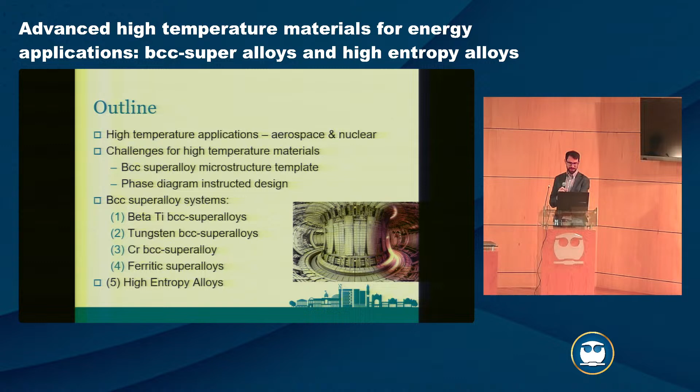For me, I spend a lot of my time thinking about energy and how we're going to solve the climate emergency that we face at the moment. We see that year on year, temperatures are getting hotter and hotter. And as engineers, what can we do about that?

In the UK, we have an interesting situation where now we build huge numbers of wind farms. The UK is kind of lucky, we have a lot of coastline, so we can build wind turbines offshore, and that works.

It's pretty cost effective, but this was an example day, just when I happened to take a data grab from a website, app.electricitymaps.com, where you can go on and see a map of the world and what energy they're generating and what it's from. In the breakdown here, whilst in the UK we have maybe 15 to 20% nuclear, on some days we might have 50 or even 70% of the energy generated by wind.

But on this day, there was no wind. And in the UK, you can have periods where there's three weeks with no wind. If we don't have wind, then instead we burn gas. So whilst the UK has spent a huge amount of money building zero carbon wind turbines for energy generation, we still are burning a lot of gas.

At other times we're importing energy from our neighbors. So in this example, we were importing a lot of nuclear energy from France. I was trying to work out the equivalent for Mexico.

I see a lot of the work is also in very important sectors on oil and gas. Certainly for the UK and many other countries, gas is going to continue to be a really important energy source. So we need to do new things to improve the efficiency, as well as look at alternative power sources.

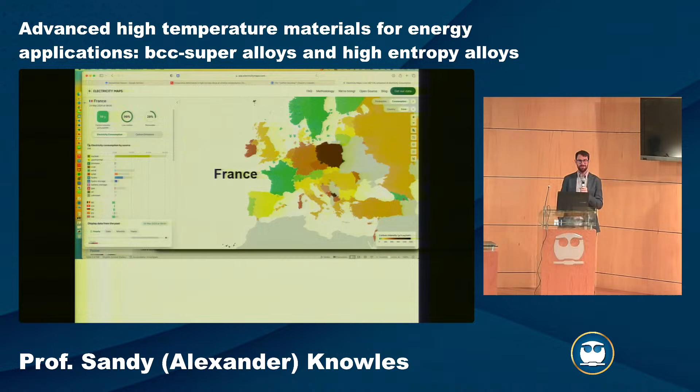For me, one of the examples of why I work on nuclear energy a lot is France. France is 70% nuclear energy. It's been that way for the last 30, 40 years. They have some of the lowest carbon intensity for energy generation in the world, and they make money doing it. They have the cheapest energy in Europe.

So for me, it works. We know it works, it worked 30 years ago. We just have to commit to do it. But in this, there's challenges, and as engineers, we have to try and solve those challenges.

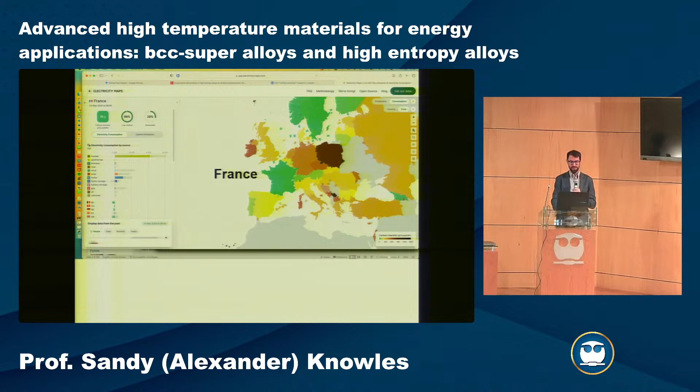So in gas turbines, we can think about these for jet engines. I do some work with Rolls-Royce, which are a jet engine manufacturer in the UK. I think it's crazy numbers - in the UK, they employ 1 in every 250 people. So as materials scientists, a lot of people work for Rolls-Royce doing jet engine research.

But a lot of the technology directly transfers into gas turbines for power generation as well. It's the same gas turbine section, which you can use for thrust or for electricity. And we've seen this huge improvement over the years in terms of reducing the amount of fuel that we burn in order to get a certain amount of energy.

So this is fuel efficiency in jet engines, or just energy generated if we're thinking about gas turbines for land-based use. This is really underpinned by what's going on in the engineering, but also specifically the materials engineering. We can think of different alloys in nickel-based superalloys. In these, we've seen progress over the decades, this gradual increase and improvement in the turbine entry temperature.

So where are we getting to? When we look at these current nickel-based superalloys, we see improvements in the turbine entry temperature from the engine and the engineering improvements, so thermal barrier coatings, cooling channels, these kind of things. But still, we want to improve the base substrate material. At the moment, when we look at nickel-based superalloys, it's coming to a plateau.

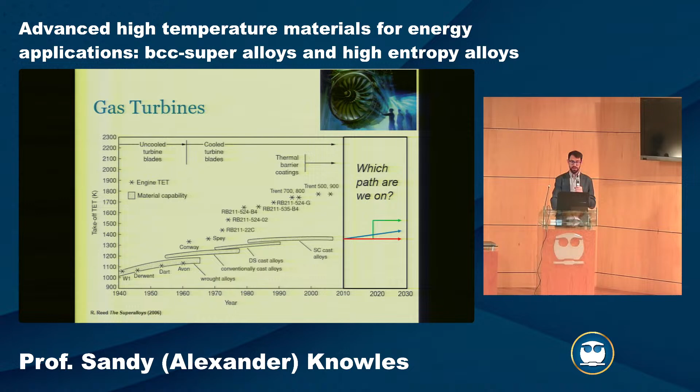So there's this big question: have we just hit the physical limit? Is it as good as it gets? We're not going to get any better? Are we going to see some kind of limited improvements in this iterative, more blue-line kind of way, where we're gradually seeing improvements, or could we instead try to look for something where we can see a step change in performance? In my research group, that's one of the things we're trying to do - is there something fundamentally different we can do to design the materials for jet engines.

We also work in nuclear fusion, so I spend a lot of my time working on fusion energy. I'm a visiting researcher at the UK Atomic Energy Authority, which works as a kind of fusion national laboratory. So JET, the Joint European Torus, has been hosted in this center in Culham for the last 25, 30 years. This still holds the kind of record for fusion energy.

That one's now just coming to the end of its research time. And we're now building in the south of France, ITER - the International Thermonuclear Experimental Reactor. I was very lucky, with Can and Tom, a PhD student and postdoc from my group.

In January, we were able to visit this thing, and it's really crazy. This thing costs, I think, $20 billion. So it's pretty expensive, and when you spend $20 billion, it gets pretty big. It's a massive, massive structure. This is kind of as big as any commercial nuclear power plant or large energy power plant. The size of this is like a 3-story building. It's really, really massive.

It's going to be probably the next 5 to 10 years until it's finished building. It's been built for the last 10 years, so probably 15 years total building time. Then we'll get first plasma, hopefully about 2030, maybe more like 2035. The key aim from ITER is that it will generate net energy out. So we can then know from a fusion reaction that we can use this to create the holy grail of energy - to almost have unlimited energy without much waste. It doesn't create long-lived radioactive waste like we have with current nuclear technologies.

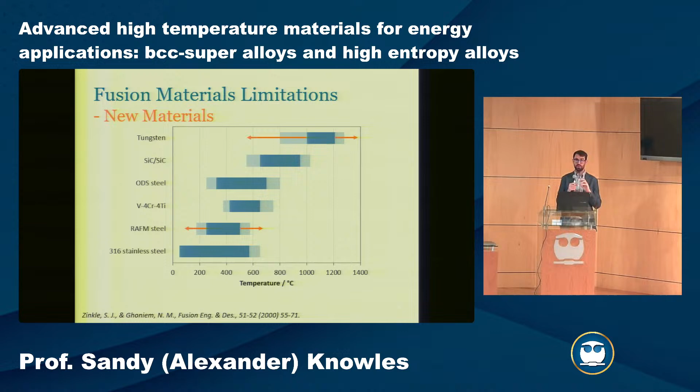So you increase the strength, but reduce the ductility. The research group, we tried to look for new materials that might solve both of these problems. We look at new high temperature materials just in terms of improving high temperature strength, improving high temperature creep resistance, also when you're irradiating it.

But we also look at technologies where we can improve the low temperature ductility and make them more irradiation resilient. So we look at this kind of host of challenges that we have for high temperature materials. It's not just kind of one parameter that we design for.

So when we want to improve a material, we often try to look to improve the strength of the material. That's kind of a first proxy for a better material. But we can't do that in isolation. We need to also think, okay, well, it's higher strength, but does it have sufficient ductility? Is it enough density? Does it have the environmental resistance? Is it oxidation corrosion resistant?

So when we design a new material, we can kind of benchmark against some previous materials, so nickel-based superalloys. When we look at, say, something like an intermetallic-based material or a composite material of ceramics, so silicon carbide or these titanium aluminide intermetallics, we often gain on strength, but then we lose out on ductility or fracture toughness. And so trying to take a material that creates a better balance of properties is a real challenge.

So we could look at something in my group - this is what we work on - trying to see whether we could beat this property balance by looking at something like BCC superalloys or also refractory high entropy alloys. In these we might get a small improvement or some improvement in strength or density, but without this massive cost in terms of fracture toughness.

And particularly we're looking at whether there's new strategies by which we can design for ductility within BCC metals.

So when we think of current high temperature materials, if we look at gamma prime in nickel-based superalloys, these ones are kind of the state-of-the-art materials used in jet engine materials. They can be hugely expensive. You're happy to use kind of elements like rhenium in them. Nickel itself is already pretty expensive. And in these, the fantastic thing about them is you get the high temperature strength, but also the creep resistance and oxidation resistance.

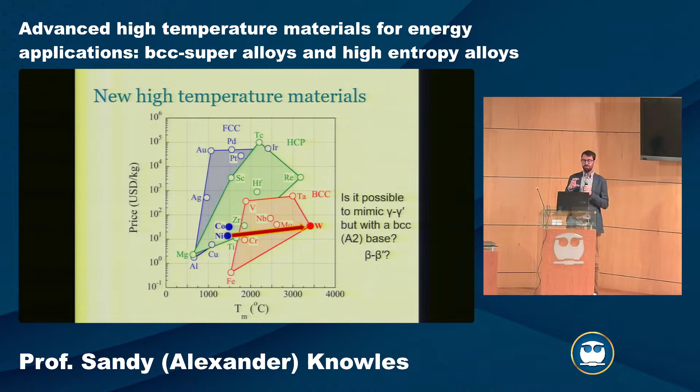So the question then is: is it possible to mimic gamma prime, but in a BCC-based system? Is there such a thing as beta prime? This has been this concept area of BCC superalloys. If we have nickel-based superalloys, I would call them an FCC superalloy. These are body-centered cubic, and we can use all of the different BCC metals that we might be interested in, from titanium, chromium, tungsten, molybdenum. And then we need to think, okay, well, we've changed the crystal system of the matrix phase, so we also need to change the crystal system of the intermetallic reinforcement.

Luckily, there are a large number of intermetallic crystal structures that do have an ordered BCC crystal structure. For example, nickel aluminium or titanium iron both have this ordered BCC-like symmetry, which could potentially be a superlattice compound for a BCC matrix. So what we need to do is try to find out which phase diagram is analogous to nickel aluminium. The challenge is not just having the two compounds, the matrix and the precipitate, but you need to have the two being in equilibrium with one another.

So this was this search to say, okay, we want to have the two phases, BCC and ordered BCC, in a two-phase equilibrium. Which systems exist? We can search phase diagrams, we can also use computational methods. And of the binary systems, there's really very, very few. One of the ones that comes out is tantalum technetium or titanium technetium. How many people have heard of technetium?

It's not a very common element. It has no stable isotopes, you only really get it through nuclear reactions. So again, like platinum superalloys, not going to be very useful if we need to make a jet engine out of it. But again, I'm still just amazed that someone did the test to look at titanium technetium. It's kind of a crazy thing to investigate.

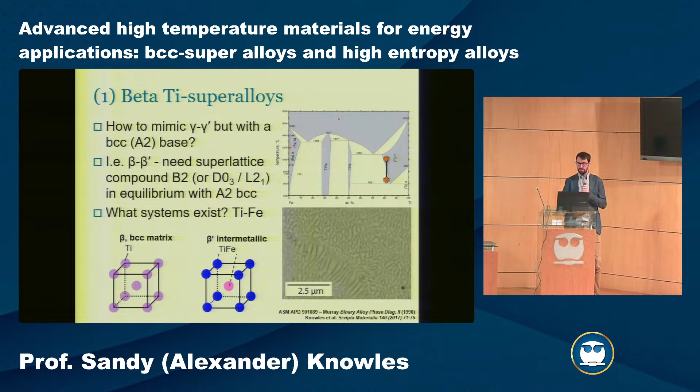In a titanium base, there actually is, in the titanium-iron system, you can have BCC titanium at high temperature in equilibrium with this titanium-iron phase, which is an ordered BCC intermetallic. Early work from my PhD time, we looked and tried to see whether you could utilize this precipitation reaction. And then Paraic and Vincent, who have been PhD students with myself, have been digging into the system in greater depth.

With Paraic, we were particularly interested in really understanding the phase equilibria. One of the challenges when we're trying to design these unusual systems that are away from traditional alloys is that very few people have looked at them, and therefore there is very little data. And if you don't have data, then you can't really design anything. So to start off with, we tried to revisit just the titanium-iron system.

You might think titanium and iron are quite industrially used very widely, both titanium alloys and steel metallurgy. You might think the understanding of how titanium and iron mix together is very well understood, but we found that actually a lot of people haven't looked into these spaces between the two elements in great detail.

So we looked at both the phase equilibria, so we can do things like SEM EDX, scanning electron microscopy, where we can identify the precipitates and measure their composition. We then went into more detail with transmission electron microscopy images, where you can see the columns of atoms and how they're arranged.

We tried to use this, as well as adding in additional elements like aluminium and chromium, in order to improve oxidation resistance. So this was one project with Paraic. With Vincent, we had a project particularly interested in the mechanical behavior of these systems and looking at slip systems. I'll talk about both of these in turn.

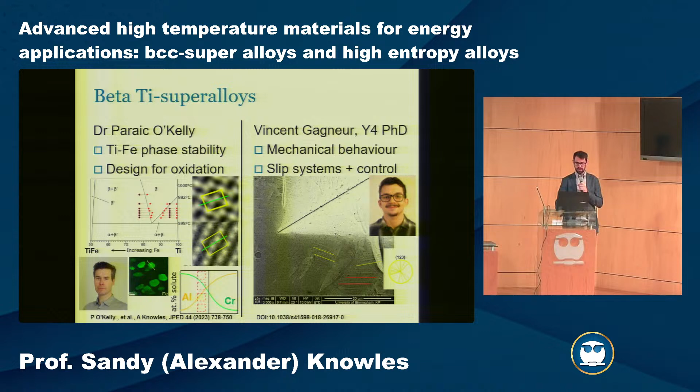So understanding a bit more about the binary phase diagram: we have this high temperature BCC phase field, we have this intermetallic of titanium iron, and we're particularly interested in this region in the middle between beta and beta prime, where you have the two phases in equilibrium.

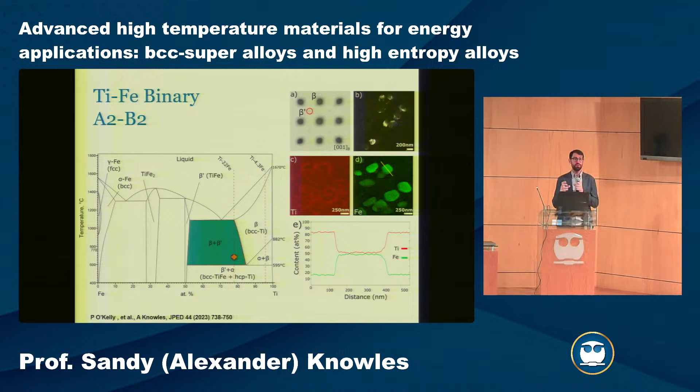What we found is that if we take specific compositions of alloys and choose the heat treatment carefully, we can produce these kinds of microstructures that end up with a two-phase structure of BCC and then the titanium iron intermetallic.

Instead, with Vincent, we were interested in the mechanical behavior of these systems. When you deform a BCC metal, you have dislocation motion, typically a half-one-one-one type Burgers vector, where you're going from the corner atom to the center body site. That allows you some ability to have ductility and toughness in a material.

One of the challenges in the titanium iron intermetallic and some other intermetallics is that rather than slipping to this body-centering position, which swaps the two atom types - you have your A atom on one corner and B atom in the middle - if a dislocation goes through that corner diagonal, it swaps the atom positions, creating an antiphase boundary, which has an energy penalty.

In the case of titanium iron, the atoms really don't want to be similarly bonded. They much prefer a titanium-iron bond than a titanium-titanium or iron-iron bond, so instead it deforms on 100. This avoids forming an antiphase boundary, but it's a longer Burgers vector, and the challenge is then you also don't have enough slip systems for full ductility.

So with Vincent, we wanted to find a high throughput way of screening this. Every time you do TEM analysis - anyone who's done TEM microscopy knows - you lose probably 6 months of your life on one sample. So we wanted to see if there's an easier method of doing this.

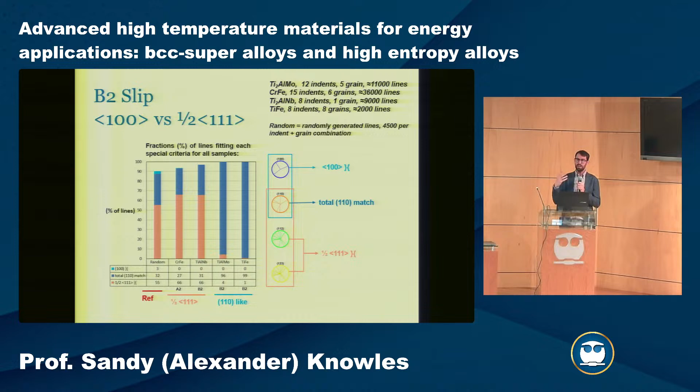The next system I want to talk about is tungsten BCC superalloys. We took the knowledge we had of the titanium system and the titanium-iron intermetallic, and asked could we do the same thing but combining it with tungsten? So now we've gone from a binary phase diagram, moving in complexity to ternary systems.

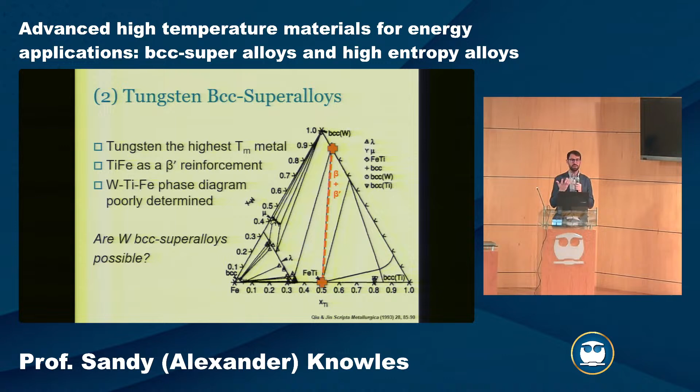Along the bottom here is this titanium-iron system. The bottom right is our BCC titanium. In the middle we have our titanium-iron intermetallic. The question we had is, going across this phase space, is there a two-phase line that goes all the way up to BCC tungsten? This would make the idea of a tungsten-based superalloy, which would be really cool if possible.

So we go in, make alloys, choose different compositions, tune and try to scan across the phase diagram, making steps in composition. This is an example for one of the alloys we studied - I think it was 5 to 10 alloys of different compositions. With this alloy, you have BCC tungsten, BCC titanium, and also this beta prime titanium iron, so there's equilibrium between these different compounds within the phase diagram.

When we zoom in with TEM, if we go into these dendrite regions, the tungsten-rich regions, we see there's a secondary phase within them, and we were curious whether that phase might be titanium iron. So this is transmission electron microscopy again, where we're looking at the composition of those precipitates. We see they are enriched in titanium and iron, with the matrix being tungsten.

We can then do diffraction, select area diffraction methods, where we go into the TEM and do electron diffraction, and we can see characteristic reflections of this beta prime intermetallic. So we both have something rich in titanium iron, but also this has the crystallography consistent with the titanium iron phase.

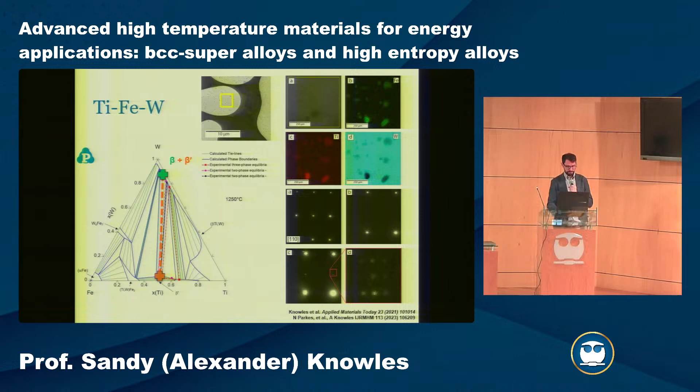So we have this method called CalPhaD, one of the main computational design methods when doing alloy design. One of the things CalPhaD has done is taken in all of this phase diagram understanding and pulled it together. So rather than me just pointing at a dot on a phase diagram, you can say that composition, that temperature, and read off which phase is present - this is CalPhaD, computational phase diagram models and databases, which you can plug in on a computer.

You can say I want to give this composition with this temperature, and it will predict what is the likely phase formation. You can also tie that into scripts and do almost like AI-directed materials design.

One of the questions we often have with these BCC superalloys is whether we can do computational design with these new alloys. One of the challenges is that we don't have the base data - the model relies on prior data, and if you don't have any data, you're not going to get a very good prediction. So for a lot of our work, we've had to go and do things experimentally - you go melt it and really look at it.

What we try to do is take that knowledge we've gained experimentally and tie it into a model. So over time, we'll build up predictive understanding.

The other side of things is to try and start to demonstrate the properties of the materials. So this was what I would call model alloys, still quite simple, just binary and ternary compositions. But we can begin to look at what kind of properties can be achieved in these materials.

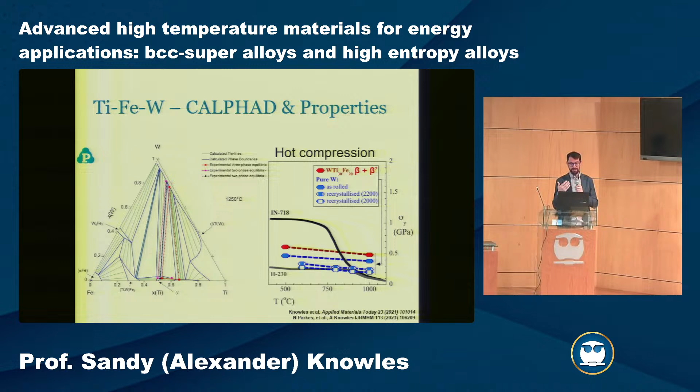And what we find is this tungsten superalloy, at 1,000 degrees C, we're still maintaining half a gigapascal, so 500 megapascals of strength at 1,000 degrees from a very, very simple alloy, literally just a 6 month to 1 year project, and we can already beat nickel-based superalloys and tungsten. So this gives us confidence to continue going down this path.

The next system is then looking at chromium-based BCC superalloys. This is work from Dr. Kan Ma and Tom Blackburn, who have been researchers in the group on a European project.

In concentrated solar power, you have photovoltaics, which is what people typically consider as solar panels or solar power. But there's an alternative method where we instead use thermal solar.

In this, you have a massive field full of mirrors, maybe 1 or 2 kilometers, a big field full of just mirrors, which all focus the sunlight to a central tower. That's what's indicated on the left-hand side, but there can be maybe 1,000 panels within an array, and they're all just focusing, with just a mirror, the sunlight to this central tower.

At the central tower, you can then get to really, really high temperatures, so you can melt steel very easily. You can go to around 2,000 degrees if you wanted to. It just depends on how much coolant you put through, but very, very high heat depositions.

In the technology being pursued by our consortium, but also by Heliogen, which is a unicorn, a multi-billion-dollar startup in the US, the idea is to use ceramic particles as the heat transfer medium. They have good stability, high energy density, and you can then take these hot particles and also store them. So when the sun isn't shining, the particles stay hot, giving you a way of storing that energy over time.

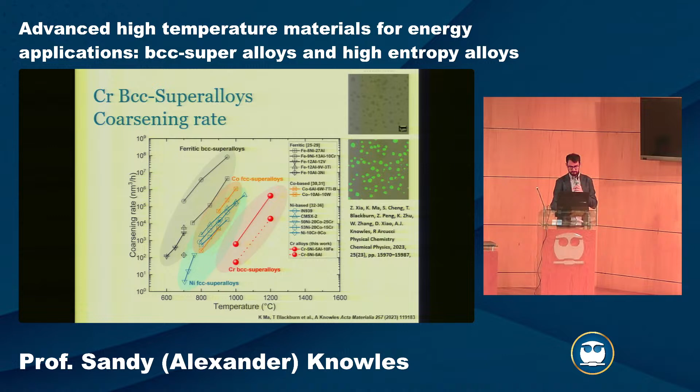We then also looked at the mechanical behavior of these things. These are relatively simple alloys, with four elements: chromium, nickel, aluminium, and a certain amount of iron to tune the microstructure. We can get very high yield strength at high temperature, competitive with about 30-40 years of nickel superalloy development in the case of about 3 years of work, which is really exciting. So we're there in terms of strength. We're not yet there in terms of the balance of properties. We get good strength, good oxidation resistance, good corrosion resistance, but we don't yet get ductility.

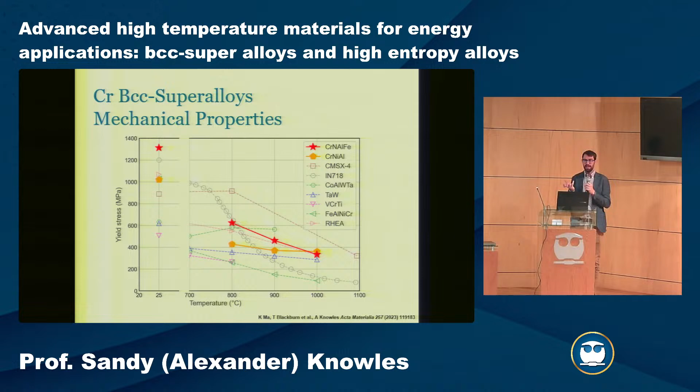This is one of the major challenges for BCC superalloys, for BCC alloys, and for intermetallics: trying to get this combination. You can improve the strength, but do you do it at the cost of ductility?

So the last of the BCC superalloy systems is this one class of ferritic superalloys. We have quite a large number of people working on this in the group. It's quite an attractive system, based on iron and aluminium. As you add aluminium into a steel, you reduce the density, which is quite attractive if you're trying to lightweight automotive and other applications.

Again, we're taking this microstructure concept of a BCC iron-based matrix, with ordered intermetallics as the reinforcing phase. You can form these cuboidal gamma-gamma prime-like microstructures, but instead now we're, I guess, alpha-alpha prime, using steel nomenclature.

So here we have the interest of developing high temperature strength, but we're also now looking at a radiation environment. When you irradiate a material, you bombard the lattice sites with an incident particle, which might be a neutron or a high energy ion. As it hits into the lattice, it disrupts and creates a cascade of damage. When you impact and irradiate a material, you tend to create a lot of vacancies and dislocations, creating defects within the material. These will harden the material, but also potentially embrittle it.

So what we really wanted to look at is using interfaces as defect sinks. If you have an excess of vacancies or dislocations within the material, a large number of interfaces can act as sinks for these radiation defects. If you imagine a dislocation at the interface, and a vacancy moves to that region, it can just extend the dislocation line, allowing for the annihilation of that vacancy. So if you can reduce this accumulation of defects within the material, you can make it more resilient to radiation damage.

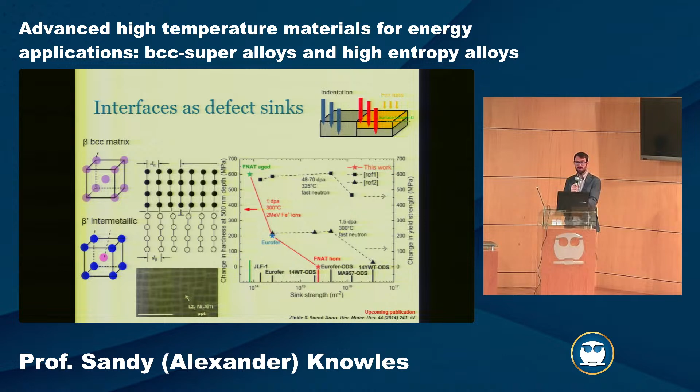Within Birmingham, we're very lucky. Within my lab, we do a lot of work on physical metallurgy - producing alloys, doing characterization using advanced methods like SEM and TEM, and we also collaborate for atom probe tomography. Then we do mechanical testing, this kind of thing.

The other thing we're very lucky for in Birmingham is that we have a very strong physics department, and within that they do a lot of particle accelerator style work. This includes something called proton irradiation. So we have a cyclotron - we can accelerate protons within an electric field and large magnetic confinement, and we can irradiate the material with protons.

If we do this, we can use a different method of studying how the material behaves to best simulate a nuclear environment. As well, we also have a neutron accelerator, so we can bombard materials either with protons, light ions, or with neutrons in order to simulate irradiation damage.

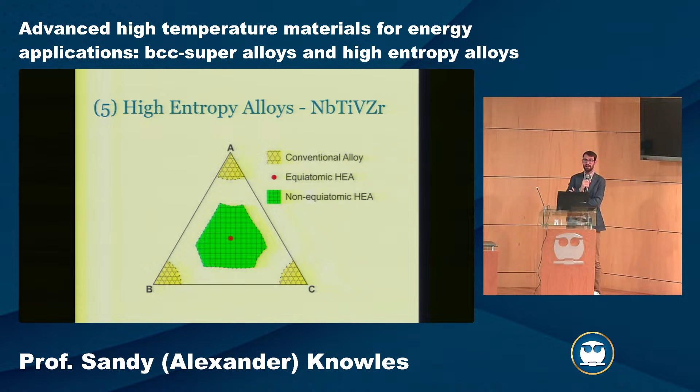So the last topic area I wanted to talk about is high entropy alloys. This has seen a lot of interest in the academic community recently - in metallurgy it's definitely a very popular area. We're going to talk a little bit about what they are and some of the work we've been doing on them.

In a high entropy alloy, there are other phrases used to define them - they're also known as complex concentrated alloys or multiple principal component alloys. The key concept is that rather than having a pure element - previously we've talked about tungsten alloys, titanium alloys, steel alloys - in this, we instead look at something which is a combination of elements.

If we look at this kind of pseudo-ternary, we have A, B, and C - these might be pure elements. But instead, if we mix them in equiatomic concentrations, we get something different in the middle of this phase space. What was particularly unusual about high entropy alloys is that when you mix multiple elements together, as we saw in previous work with binaries and ternaries, you often get intermetallics. So for example, if we added chromium, nickel, and aluminium together...

We formed a two-phase equilibrium which contained BCC and nickel aluminium as an intermetallic. What's been quite unusual in a number of high entropy alloys is that it's possible to form a simple crystal structure - be it BCC, FCC, or HCP - within this complex composition space. And that gives us a new design rule in order to make new materials.

So the idea here is that we've got a simple crystal structure - we've got a large number of elements, but a simple crystal structure. This means we have very, very different properties in that material compared to a pure element. There are a few ideas here.

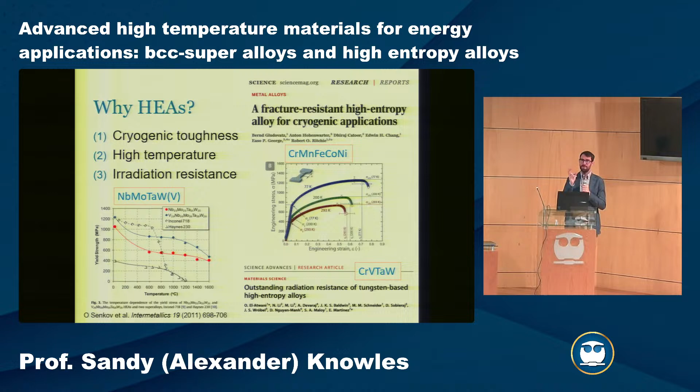It's not a guarantee, so not all high entropy alloys are fantastic. Some of them are terrible, but some of them show this kind of behavior that really doesn't exist in other materials. And if we can understand the mechanisms for that, it can really help us try to design new materials.

So this has become a huge area internationally. Now year on year, we're seeing over 1,000 papers published a year by the community, which is a big increase compared to any other sector. So certainly this is one of the fastest growing areas of metallurgy, I would say.

Probably a similar thing 5-10 years ago, we saw a similar trend, say, in additive manufacturing - a huge growth trend. Now I don't know if we've seen peak additive, but we're certainly close to it. Whereas in high entropy alloys, it seems to be growing very quickly.

And over the last couple of years, I've spent most of my time working in refractory metals, and we've seen a big growth in the refractory high entropy alloys.

So the question is, what do you do? How do you design a high entropy alloy? A high entropy alloy can just be defined by mixing different elements together. So we could take a dartboard and just throw darts at it, pick 5 elements, and that would be a high entropy alloy.

And I think this has kind of been done. If you go in the literature, there's lots of different mixes. You have a paper which is, okay, we'll do zinc, molybdenum, cobalt, iron, aluminium, and we'll see what happens. You can just mix it together and have some fun as a physical metallurgist seeing the microstructure and seeing what the properties are.

So maybe doing it completely randomly is not the best idea, but every so often - you know, we discovered penicillin from a kind of random chance thing - so maybe we should sometimes do some random chance work.

Other things we could do - well, we could just say, Brian over there, Brian Cantor, did some great work, and Jien-Wei Yeh both found this alloy, cobalt, chromium, iron, manganese, nickel, and that's a great alloy. So you're like, okay, let's see if we can make it better. We could take a good starting point and try to improve upon it.

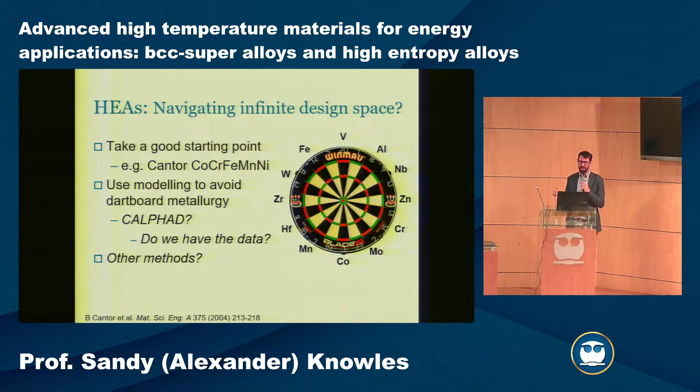So there's quite a number of groups working on this, and this was with a colleague of mine, Dan King, who did his PhD on this in Australia, trying to develop a new high-throughput screening method. He was looking at methods which are effectively akin to the Hume-Rothery rules for whether elements are likely to mix together.

So one of the parameters is just the atomic size mismatch. If elements are very different sizes, they're probably less likely to want to mix together. And he then developed this phi parameter, which was trying to predict the entropic stabilization, trying to predict entropy.

And when we take this - this code is really nice. It's technically publicly available, but I think the website link died, though we have a copy of it if anyone wants it.

The interest he then took in Dan's work, and when we worked together, was to try to combine that with another parameter. This could be melting temperature, but in our case we were looking at neutron cross-section, because we wanted to develop new materials for nuclear reactors. Within the core of a reactor, you have the fuel clad around the uranium fuel, and you want to get neutrons from one bit of fuel to the next. Currently reactors generally use zirconium, which has a very low neutron cross-section, but we wanted something with low neutron cross-section that also had potentially high temperature strength.

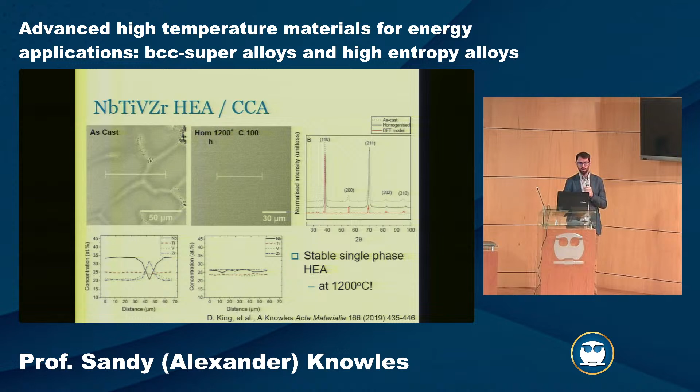If we then go on to thermal anneal it—since we're trying to develop materials for high temperature applications, we need to know what happens through the use temperature. When you process it you might need different conditions, but also when you use it, for example in a high temperature nuclear reactor, it's going to sit at temperature for a long time, so we need to know whether it might decompose.

So in this case, this high entropy alloy, despite all our entropic stabilization, doesn't stay single phase—we do get decomposition and formation of intermetallics. With some painful work, we can also do TEM as well as SEM, EDX, and X-ray diffraction to work out which phases they are. We get quite similar phases to what is predicted by CalPhaD, but at different temperatures. So CalPhaD gets some of the way there, but it's not enough to truly design an alloy—it gives an indication, but doesn't have sufficient accuracy yet.

So this could be a problem—we've kind of failed at creating a single phase high entropy alloy. But as metallurgists, the majority of materials we use do have multiple phases in them. So rather than having something single phase, we now have a multi-phase material that is potentially a mechanism by which we can get high temperature strength, high temperature creep resistance, and also, as we talked about earlier, these interfaces acting as defect sinks. So potentially this could have the benefit of producing something radiation damage resistant.

So we have a range of different work carrying on, investigating different alloys of refractory high entropy alloys. Particularly the challenge is we want to look at thousands of compositions in a much wider design space, and how do we do that quicker? One method is to develop new modeling methods that allow you to screen and then do more focused experimentation. The other is to look at high throughput experimentation methods, where we try multi-composition gradient materials and mapping techniques so we can discover more materials in one experiment.

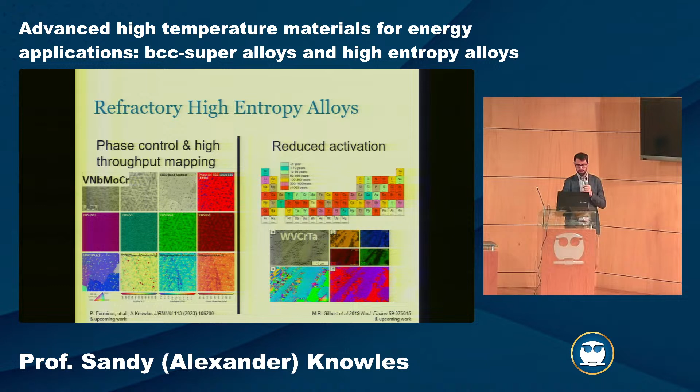This topic of high entropy alloys and BCC superalloys has now also caught on in the literature. We were doing the two topic areas separately, looking at them in isolation, but actually now there's a lot of work looking to combine them. Internationally there's a lot of work now - at TMS there were about 10 or 20 presentations on this topic of refractory high entropy superalloys, particularly this system of niobium, tantalum, titanium, vanadium, zirconium, aluminium - a bit of a mouthful. You can get these kind of cuboidal gamma-gamma prime type microstructures.

So to summarize, that's the two key topic areas we've been working on: BCC superalloys, where we can mimic this gamma-gamma prime-like microstructure but in a BCC metal. We've done a lot of work trying to produce and characterize them and evaluate some of their base properties, but there's still work to be done trying to develop adequate ductility.

Then on refractory high entropy alloys, one of the key questions is how you efficiently design these materials and discover them, and also demonstrate some of the mechanisms as to why some of them show these really advantageous irradiation performance. A big thanks to many people in the research group who have helped perform this work, as well as many collaborators in the UK and internationally who have got involved to take this work forward and support me in my career.

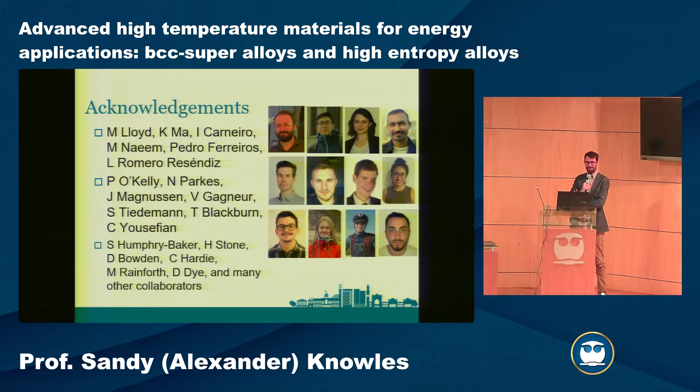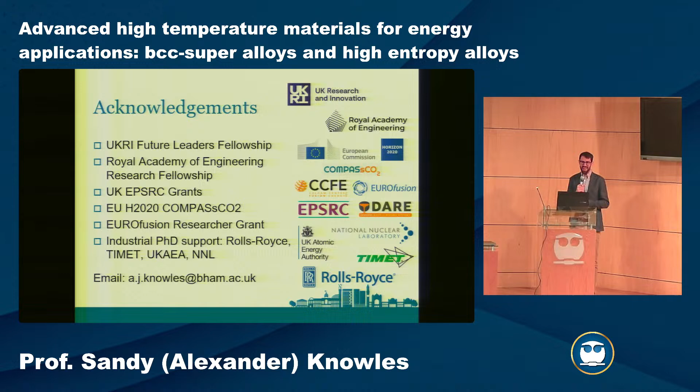And then a great many research funders who have supported this work, particularly the UKRI Future Leaders Fellowship, which has allowed me to work with Lloyd and Naeem, so that's been a great pleasure. And then different grants that we've had that support this work. So it's been a pleasure to talk to you all. Happy to take any questions.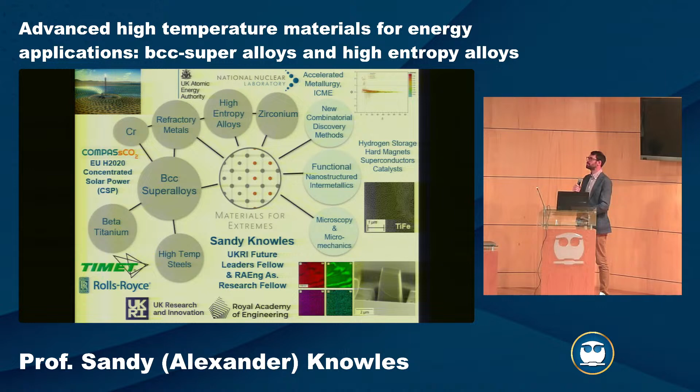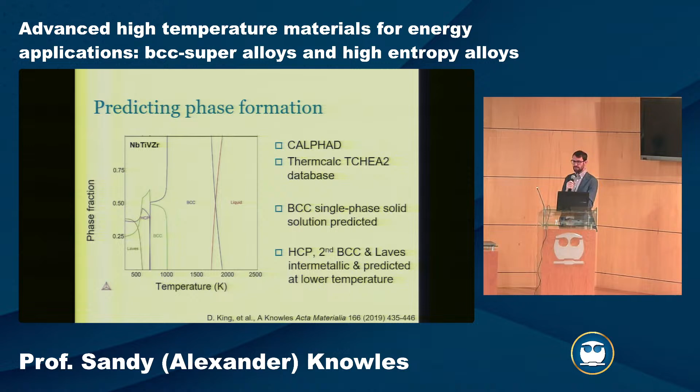Yeah, it's interesting because in this system we studied, we predicted to potentially have some Laves phase, and we do observe some of this Laves phase. It's a bit of a question around what is brittle. When we looked at the slip system type with Vincent's work, where we have these 100 versus 111 dislocation types, if you have the wrong intermetallic and dislocations can't pass from the matrix into the second phase, you might get brittle failure because dislocations accumulate, load builds at the interface, and you then get brittle failure.

So for things like cementite, it's a question of whether you can have slip transfer from the matrix to the precipitate, but also the length scale. If you make it very fine, like in cementite and pearlite, you can get good ductility because it's small enough to force dislocations through it. So there are things you can do on microstructure, and other things on the fundamental design of deformation in that intermetallic.

In general, we've stuck to these ordered BCC systems because we think we can get better load transfer and dislocation slip from the matrix into the precipitate. Whereas with a Laves phase, or maybe cementite with a large carbide, it's more likely to be brittle.

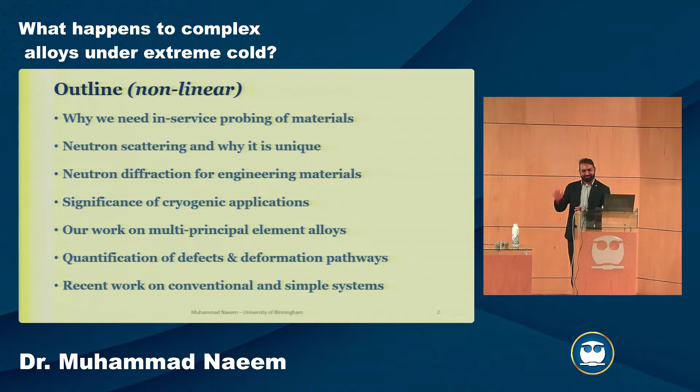So it's fantastic. Let's see why we need in-service analysis of materials, because we want things to keep running. We don't want to encounter any kind of damage. So I'll give you some examples, hopefully they can convince you that it's important.

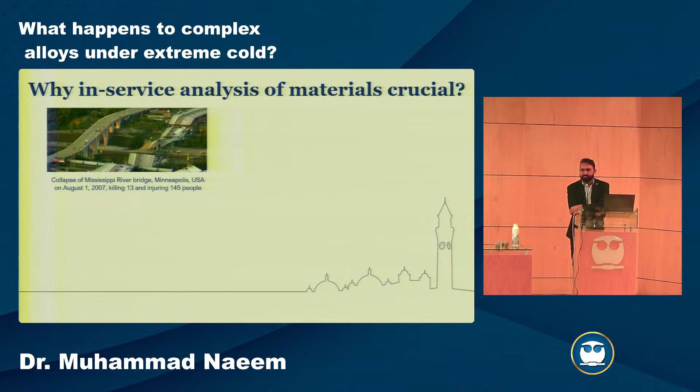This is one example: the collapse of the I-35W bridge in Minneapolis in 2007. It was caused by one of the plates it was resting on becoming very thin, like a stress concentration. It resulted in killing 13 people and injuring almost 150.

Then there's another example: a flight going from Taiwan to Hong Kong that crashed. It essentially collapsed in midair, killing all the people on board, more than 200 people. This was caused by a fatigue crack, just one single fatigue crack, and that was the result.

Then there was a high-speed train accident in Germany in '98. There was a single fatigue crack in a train wheel, which ultimately led the train to divert from one rail to another, collide, and derail. It moved off the track, resulting in more than 100 people dead and almost 200 injured.

These are some stark examples. Of course these are extremes, but people got killed. So we do have to have routine maintenance, we do have to take care of this kind of analysis.

One reason we need this is because we want lasting performance, so there won't be disruption, like a train falling behind mid-journey making you late for class or work. Second is cost, because when an accident happens it results in monetary damages. And above all, it's about public safety, because loss of life like this is not affordable.

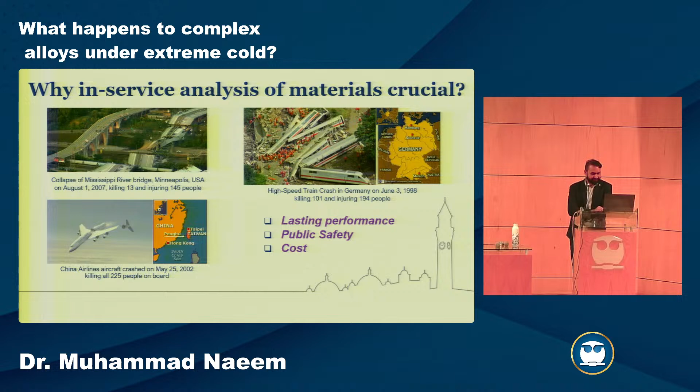So how do we do it? As metallurgists, we have plenty of tools at our disposal to undertake this task. Here's an example: say we have an automobile made of different materials, composites, titanium, aluminum, steel. We can do analysis at multiple scales.

We can use macroscopic techniques, scanning electron microscopy, EBSD at the micron scale, to look at grain structure and features at that level. Then we can go further down to the nanometer scale with transmission electron microscopy, to look at dislocations, which Sandy was talking about, since ultimately they dictate these properties. But then we can go further, to the lattice level, where crystal structure plays a very important role.

I do diffraction, either by neutron or synchrotron, based on a very simple principle given more than a century ago: Bragg's law. This is the Bragg equation. Basically, what we want to see is the atomic arrangement in a material. It's a very simple equation, I'm sure everyone has seen it before: 2d sine theta equal to n lambda.

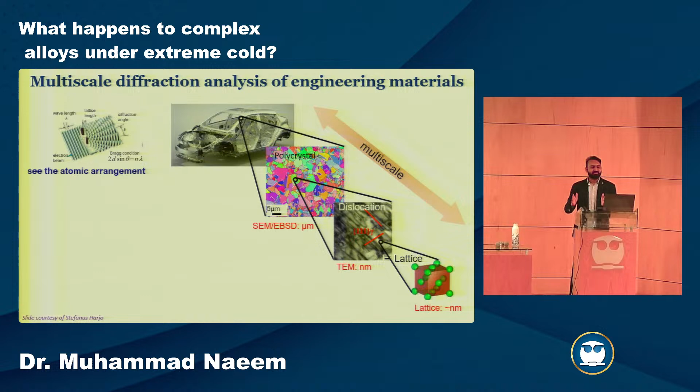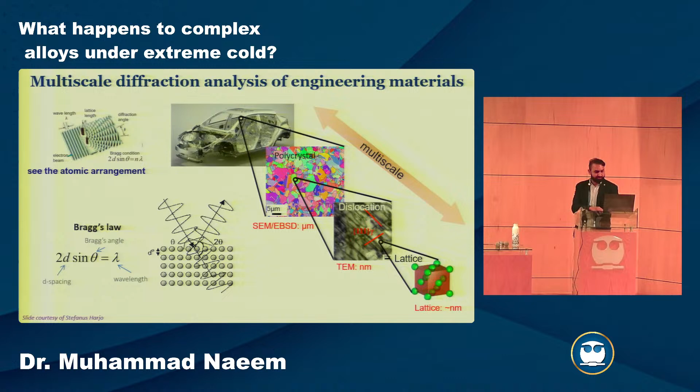Basically it's two things: you have some radiation, in this case X-ray for example, and you bombard it or shine it on your material, to measure lattice spacing, how far apart these planes are from each other. From there we can predict and see a lot of properties. What we are after is lattice spacing, or d-spacing, and that's what we get through diffraction. I have been doing mainly neutron diffraction, and I'll be saying a lot of good things about neutrons today.

They are the best, of course. So we can cover a very large length scale by using neutrons, from femtometer with elementary particles all the way to galaxy level stuff, like people probe with that. But for our level, it's small. For example, you see these motors over here, which are 1 meter or so.

So of course I will give you some details on how we do it and why, but it's just to give an idea. We can also do it at different time scales, because we can do experiments in real time, so we can get the structure, but we can also get its dynamics as well. There was a Nobel Prize in '94 on neutron scattering, and one guy got it for structure, the other for dynamics. By combining neutrons, you can do both kinds of stuff.

So this is some of the stuff which we can do with not just neutrons but synchrotron as well, but here it's mainly for neutrons.

One thing is, as I mentioned, we can probe lattice spacing with them, since their wavelength is in that range. Neutrons, as you know, unlike electrons in electron microscopy which are very light particles, or X-rays which interact with electrons, neutrons are neutral particles. So they can go directly into the heart of the atom, which is the nucleus, and interact with it. Because they are heavy, they can penetrate much deeper. So they're neutral, won't be affected by the field around an atom, but also heavy, so they can penetrate much deeper. So we can really probe big samples with this.

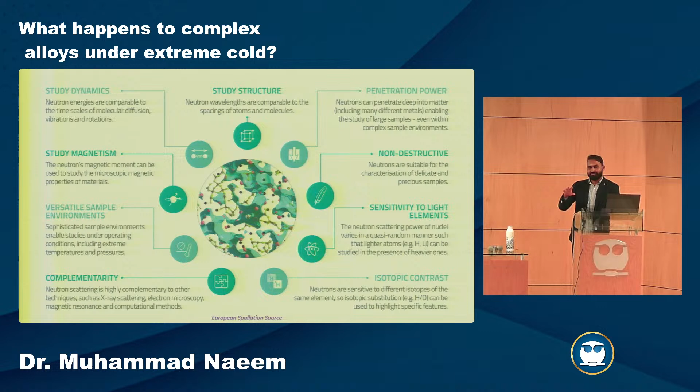Boron is really a poison, actually it's used in nuclear reactors to control reactivity of the reactor itself. There are different techniques depending on what kind of information you want to get, so it's not just one diffraction technique that gives you all of this information. The most common, and what I also work with, is diffraction. You can look at this kind of structure and deduce a number of things from that. We can also do it not only for metals or alloys, but also with liquids or non-crystalline materials, something called diffuse scattering.

And there have been a lot of work done, especially in the field of metallic glasses where people employ this technique to do diffraction.

Then Sandy was mentioning about superalloys. So small angle neutron scattering is a good technique to see contrast between precipitates and matrix, and also you can look at their morphology, size, and so on.

Then there is reflectometry, basically, which you look at the surface. Basically, you do concentration of material by probing surface of the material. So if there is gradient of concentration, you can use it for that.

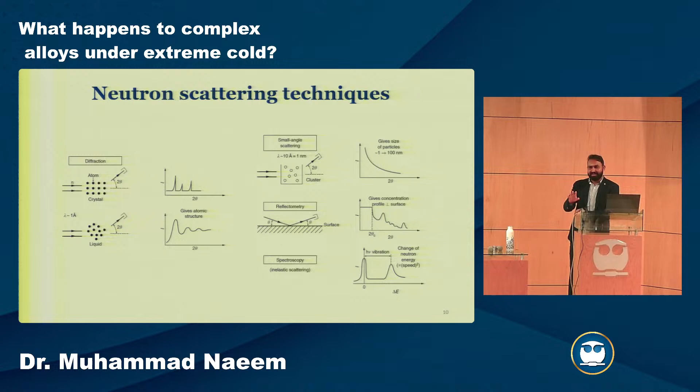Then there is spectroscopy for, say, inelastic scattering, what we call, to look at dynamic behavior of materials. There is also the one which I missed, which is very interesting, is imaging as well, where you can look at different kind of defects or structure in 3D.

Okay, so where do we get neutrons from? So we have two kinds of sources for neutrons. When neutron scattering field started in the 1940s, it was with nuclear reactors, because nuclear power was coming, and there were also a number of things done at different facilities which had neutron sources, nuclear reactors. So in this, you have a fissile material, and you basically have to have neutron beforehand. So you bombard that on that fissile material, say uranium-235.

There are a number of other combinations as well which you can use, ultimately even thorium. So you bombard it and you split, say, a uranium atom into two nuclei, and you also get, on average, like 3 neutrons per reaction. Then those 3 neutrons can continue the reaction, and you can also get some of those neutrons to carry out experiments as well. And some of them get absorbed with moderator and with coolant and so on.

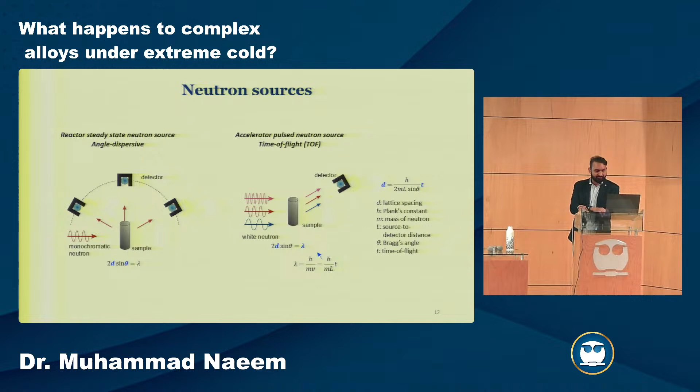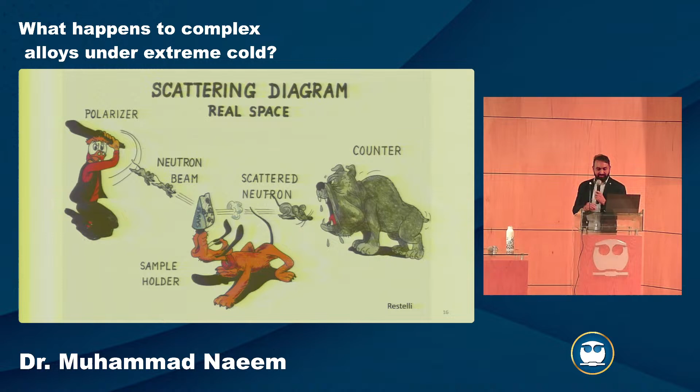This is a typical neutron scattering facility which uses a spallation source. This is the one where I have done most of my work so far. It's in Japan, very close to the Pacific Ocean. It's called J-PARC, Japan Proton Accelerator Research Complex.

You see there is an accelerator, actually two, one 30 GeV and the other 3 GeV. It accelerates protons, and then ultimately it interacts with the mercury target, and the neutrons are generated and taken to study the material.

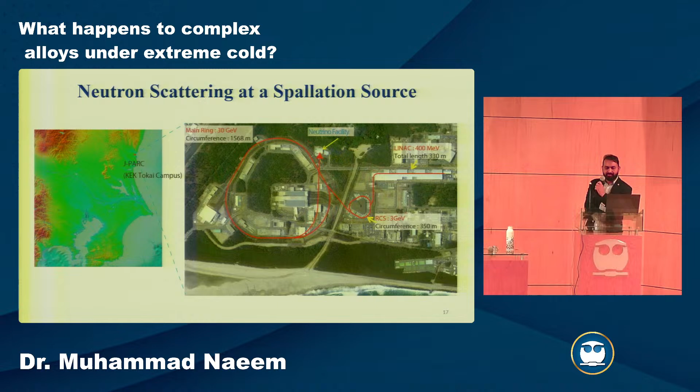As I mentioned, we can get different kinds of information from the sample, so they have different beamlines, which we call beamline or instruments to do that. Some of them are suitable for doing, for example, precipitate studies in superalloys, where we use small angle neutron scattering. Then there are others which we can use for high pressure, for geology people, they use mostly that one. Then there are others as well.

But the one which I was using, can I say, yeah here, in red, right? It's called Takumi, which is the engineering materials diffractometer.

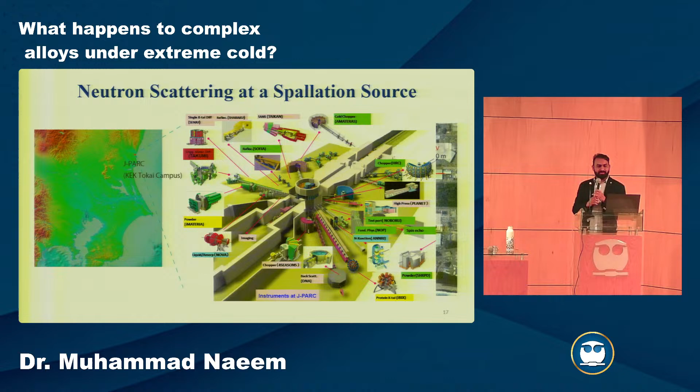How do neutrons let us see this, because we get these peaks. When we study mechanical behavior of materials, this is how we get that information. Suppose this is our polycrystalline material with grains or crystallites oriented in different orientations. Radiation comes, interacts with the material, and you get a diffraction peak, which has a position, some intensity, and some broadening. All the information we get comes through these peaks.

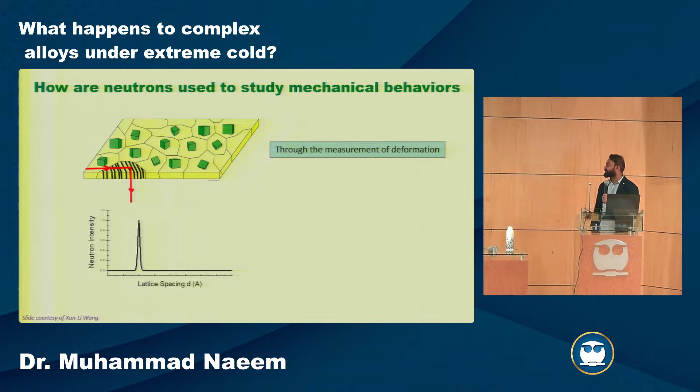Then if we apply a force on it, what happens? This peak can move, depending on whether it's tension or compression. This happens because of the average strain in the material, since the lattice is being stretched. That's the distortion. Then the peak can also become broader.

That broadening can tell us something about the subgrain structure. For example, dislocations are generated and increasing, dislocation density is increasing, or other features like stacking faults or twins appear.

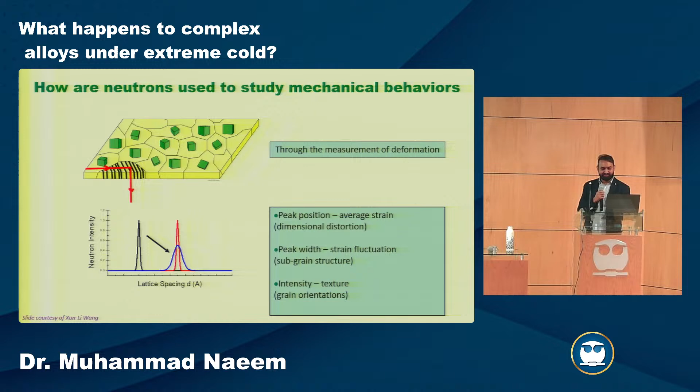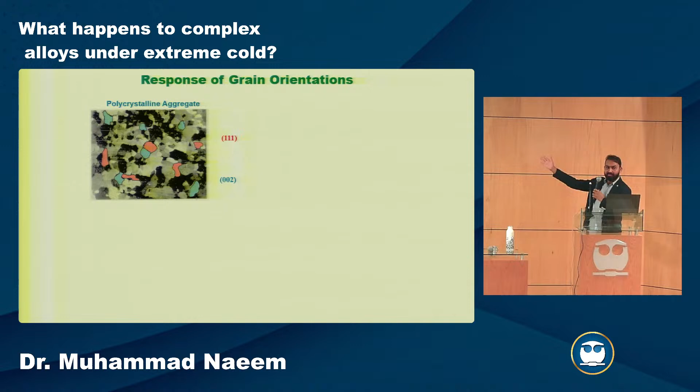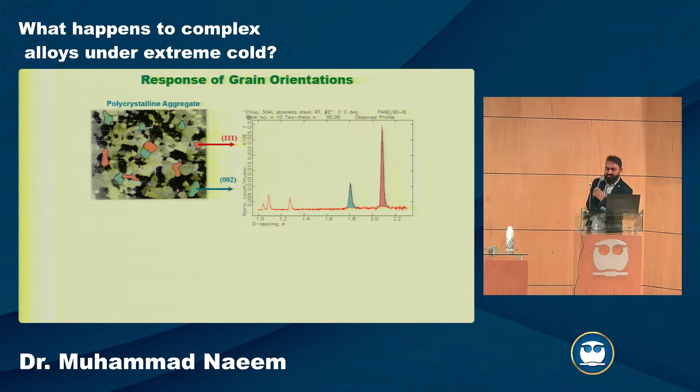Now this is a typical polycrystalline material, I think this is 304 steel, with grains oriented towards, say, 111 and 002. How would that look on this peak? You see the first peak—all these grains contribute to it—and these blue ones contribute to the second peak.

By looking at this, we can get information about material behavior, and we can also look at different grain families' behavior during deformation by how the interplanar spacing changes.

Now going to the instrument we use. You see this huge machine sitting on a sample table. On top is the loading machine, which we use for cryogenic experiments. On two sides you see this conical structure—those are the detectors. The neutrons come from the back of this machine.

They interact with the sample and are scattered towards these two detectors. Because there are two sets of detectors, we can get behavior along the loading direction when you're pulling the sample, and also transverse to that direction.

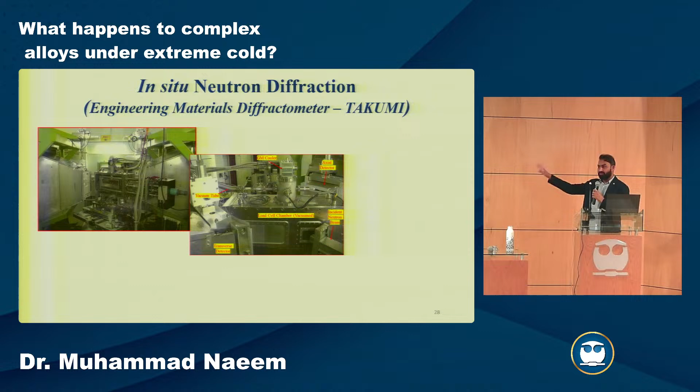This is a close-up of the machine we use for cryogenic experiments. Here you see the detector banks, and this is the neutron beam. This window is made of vanadium—if it were steel, it would interact with the neutrons and you'd get peaks or signals from it, but vanadium is transparent to neutrons.

So it just passes through and interacts with the sample, which I'll show here—this is the sample inside the machine, held with these joints, and these are copper coils connected to the grips. The temperature here is about 4.2 Kelvin, achievable by this kind of machine, and through conduction we get around 15 Kelvin on our sample.

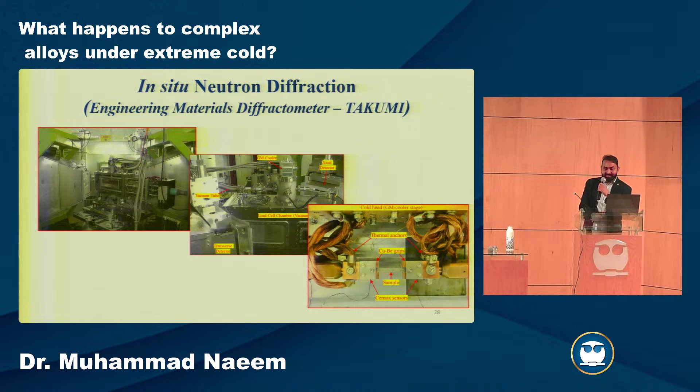So 15 Kelvin is a very low temperature, much lower than typical. There are a number of applications that actually use that low temperature, which I'll come to in a bit.

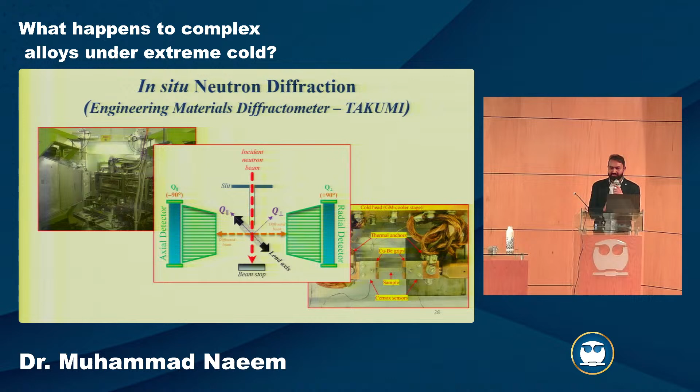This is a simple schematic of what's happening. Neutrons come from this side, the sample is here, and it interacts with the sample, affecting diffraction depending on loading and transverse. We get signals in our detectors, and from there we process our data.

Just to give an example at low temperature—not too low though—in 1986, the space shuttle Challenger took off from Florida in January. It took off, and within 60 or 70 seconds it collapsed and exploded, just over a minute after liftoff. All seven astronauts on board were killed. There was a huge controversy about it, and they had to cancel a number of programs. A commission called the Rogers Commission was formed to investigate what went wrong.

And who knows Richard Feynman? Have you heard of Richard Feynman? No?

He's a very interesting guy, really amazing person, and also amazing scientist. He was one of the members of this commission. You also see a guy sitting next to him - this is Richard Feynman, and this is another guy, Neil Armstrong. Who knows Neil Armstrong? Who was he? Yeah, exactly, first person on the moon.

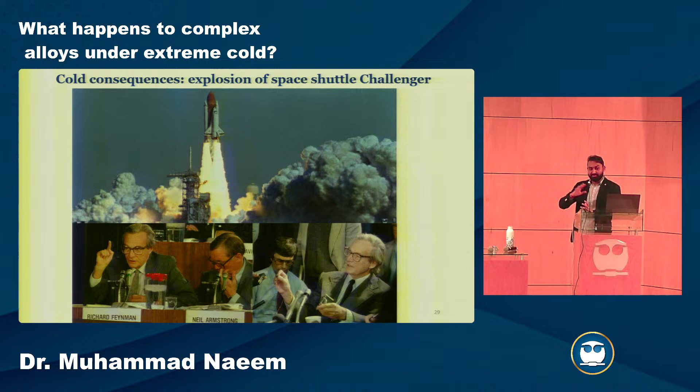That O-ring lost its flexibility, and that was ultimately the reason why the space shuttle exploded. So this is one of the examples - again, it's not very low temperature, but it can have huge consequences.

Another application is magnetic resonance imaging, which also uses cryogenic temperature. Then another application is transportation and storage of liquid gases. One of the best examples is liquid hydrogen, because the hydrogen economy is moving forward really fast, and liquid hydrogen exists at 20 Kelvin. So we need material which can handle them at that temperature.

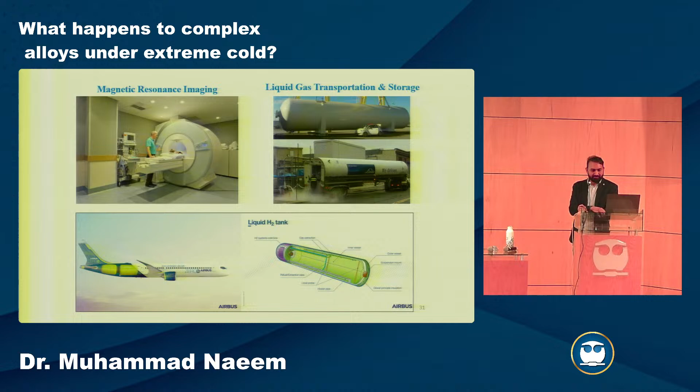Because of dislocation - everything about deformation is related to dislocations. Basically, dislocation movement becomes difficult, so they become less mobile. There are a number of other factors I will not go into detail about, but material becomes stronger at low temperature - their yield strength increases, but their ductility usually decreases. Some materials even become brittle at low temperature - they have a ductile to brittle transition temperature. But usually FCC, face-centered cubic materials, don't have that kind of issue.

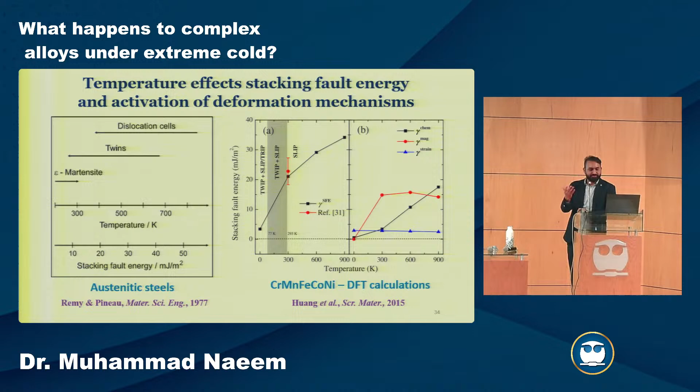So that was when we wanted to see what happened. We did an in situ experiment with neutron diffraction at 15 Kelvin. Indeed we see an increase in strength and also increase in ductility in the same alloy they were working on. But when we look at diffraction patterns, of course there are peak position changes, they become broader, their intensity changes, but we don't see any new peak related to a second phase coming out. So there is no phase transformation in this case.

So this study, which we published now about 4 years ago, found that there was something wrong with those calculations. Indeed they revisited them and realized they had not included vibrational entropy, which can play a significant role at low temperature.

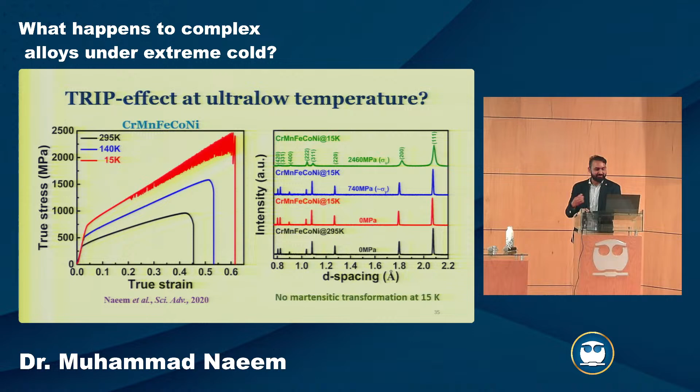From this difference in lattice strain between the same family of planes, we can obtain something called stacking fault probability, because this difference is given by how the FCC is arranged. Like we know the arrangement of FCC, the ABC repetition of the lattice. But if you remove a layer or insert an extra layer at a certain point, that's what we call a stacking fault. So by splitting these two peaks, we can obtain stacking fault probability.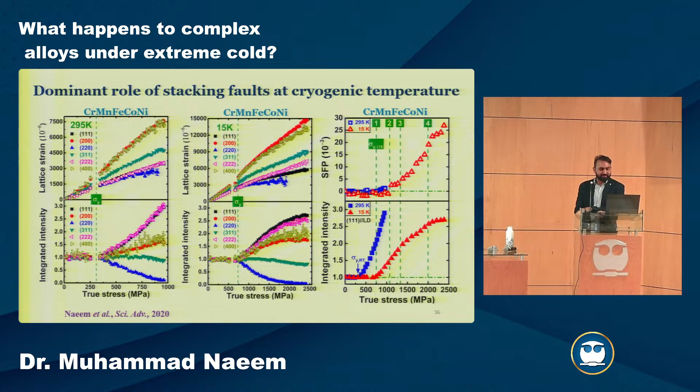So the relative peak shift is usually associated with stacking faults. If the peak broadening, that's basically a signature of dislocation density increasing. And if you have this asymmetrical broadening, that's related to twin faults. And then we can quantify these by using certain models or equations.

This is what I've shown for a different alloy which had 5 elements, and now this is for 4 elements. So we started with 5 elements, and then we removed manganese, and this one also has quite similar behavior. And then we can quantify contribution at different temperatures with stress. For example, dislocation density increases at low temperature, twin fault probability also increases, but it has very different behavior for 40 and 25 Kelvin, very close temperatures. And stacking fault probability also increases at low temperature.

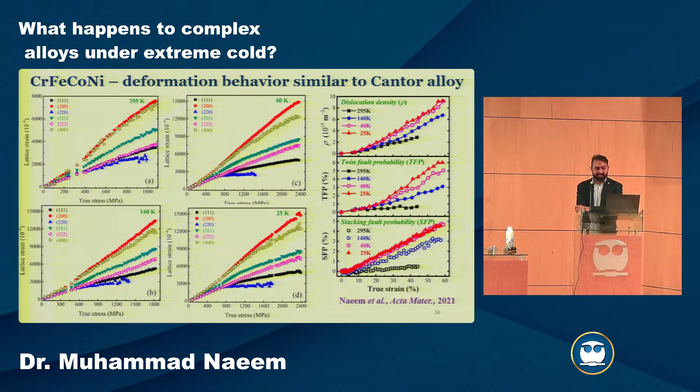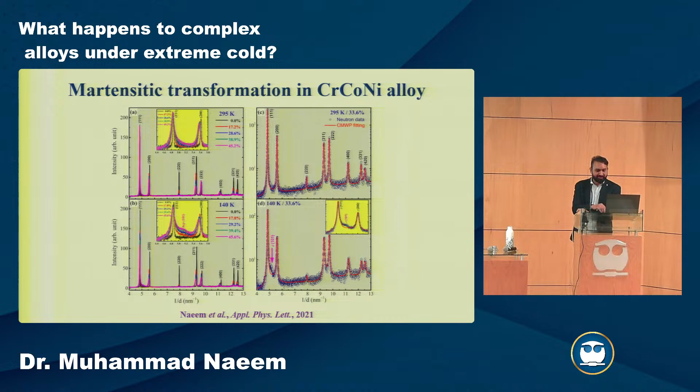Then we went from 4 elements to 3 elements, so we removed iron and then we see what happened. This was the alloy where we could see martensitic transformation, like there is this small peak which is coming, which belongs to HCP, hexagonal close-packed structure, from FCC to HCP, which has its own contribution.

So these are 3 examples where multiple deformation mechanisms are happening. There is, of course, dislocation slip. There is also twin faults or stacking faults, but also martensitic transformation for chromium, cobalt, nickel. But then there was this report about vanadium, cobalt, nickel, where vanadium has much larger size and much higher misfit volume, and it can have much higher yield strength because of that.

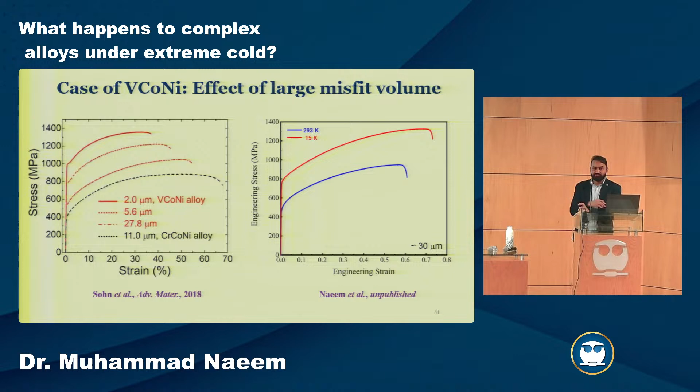So we were very interested in that material, and we used one of the materials which is not that fine grain size, a bit coarser grain size, and it also showed increase in strength and ductility. But it was very peculiar for this example.

And then we quantified its dislocation density, and it showed a very interesting trend. It had kind of a two-step dislocation density accumulation. One is slower, and the second one is faster, but the faster one starts earlier for low temperature. And because dislocation density is higher at low temperature, and also starts earlier, you have a higher strain hardening rate for this one.

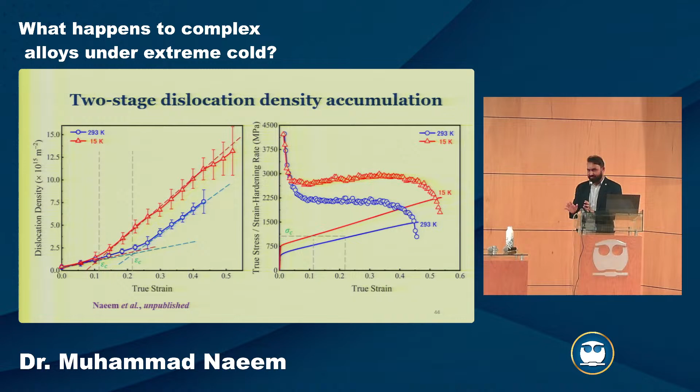So this work is still unpublished, but we think it's very interesting that this one has only one mechanism, because the claim from the first paper when it was published, and since then people have been saying, is that when you have multiple deformation mechanisms, you can have increase in ductility and strain hardening. But in this case, it is only dislocation slip, but still you see increase in ductility as well at low temperature.

Then these were the examples of so-called medium entropy alloys or high entropy alloys. I was co-supervising a student at City University of Hong Kong, and we thought about looking at conventional systems or more simple systems which are more understood. So there was a student, Yuemin Ma, PhD student, and her thesis was based on understanding mechanisms in these kinds of alloys. One was 316L steel.

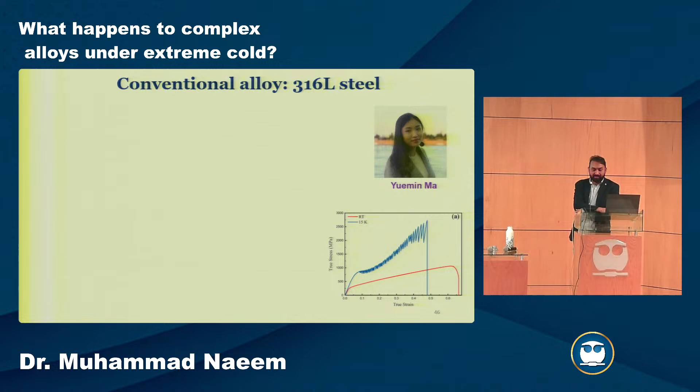So same, if you look at the 316 steel's testing curve, it does not become brittle at low temperature, it has significant ductility, but it does not increase. But if you look at its strain hardening, how much it hardens or work hardens, what we call, it's very significant compared to room temperature. So now you look at these diffraction patterns, this map, along two directions, one is loading direction, one is transverse.

You remember, like I mentioned, one is for loading, one is normal to that. In this case, I showed the previous example where the same peaks were changing, but there were no new peaks. But here you see that some new peaks are coming, right?

For example, after around 2 angstrom or so, there are new peaks, and then another one appearing over here. So initially it was FCC, face centered cubic, but then in the transverse direction you also see peaks like this epsilon phase, and also alpha prime, which is a BCT martensite phase.

And then we can quantify the contribution of, this is kind of like what Liliana also worked with, this heterostructure material, but this is a heterogeneous material, like a composite as well, because it has HCP, BCC, and FCC, and in this you can see which one is contributing more towards ultimate stress.

So these are phase stresses for FCC, HCP, and BCC. BCC is the one contributing more to this high strain hardening, and also dislocation density is much higher. So you see FCC is these black ones, much higher in BCC over here, these red ones, and HCP appears and then disappears.

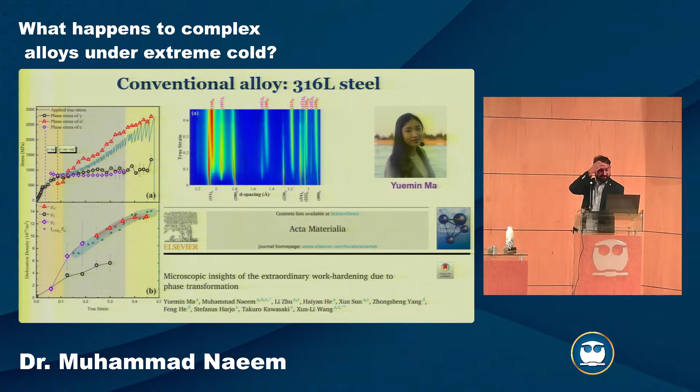So we also tried to understand the mechanism of how FCC to HCP to BCT transformation is happening. This was published just a few months ago, I think 3-4 months ago, in ACTA, and it was a very interesting study.

Then another project of hers was looking at cobalt nickel, because we were going up to chromium cobalt nickel ternary element, and now we wanted to simplify it to understand mechanisms, since it's much easier to do in simple elements, maybe not that easy still, than really complicated systems.

So we picked one system, cobalt nickel, which was FCC. Cobalt 35, nickel 65 in atomic percent. This is a very simple system, because this increase in ductility was somehow associated with these multi-component high entropy alloys. But this is a very simple system, and still you see increase in strength as well as ductility at low temperature. This was very interesting to us.

And in this case, again, we quantified different kinds of mechanisms, and at low temperature this dislocation density becomes significantly higher. We have very high twin fault probability, but also there is martensitic phase transformation happening in this case, which is contributing to very high strain hardening rate, and these mechanisms come together to give rise to higher ductility as well.

Then we also worked on heterostructured stainless steel, with Dr. Liliana. In this case, we did experiments at room temperature and 77 Kelvin. So heterostructure, I think you already know her, and you can talk to her about it. This is a heterostructure material which has different magnitudes of grains, like very fine, very coarse, not very coarse, but like very fine and a bit coarser. And it has very interesting results.

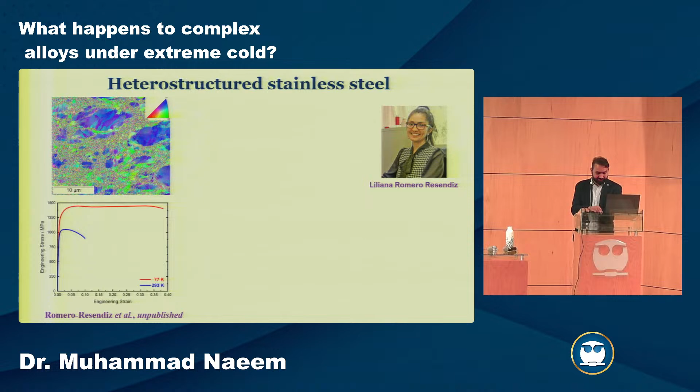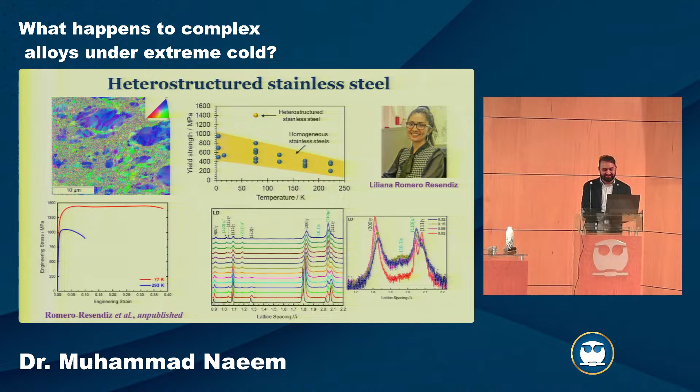And again, the reason for this is we did also in situ neutron diffraction, and you can see different phases coming out, including HCP a little bit, but then it is disappearing. There is no peak over here, then there is this tiny bump over here, then it disappears again. And then there is also alpha prime phase as well. How it changes with deformation, you can see how this phase is coming and then going, and these two are changing. So alpha prime is growing at the expense of gamma.

We have this work just published, fresh out of the oven, just last week, and we were very happy about it. I won't go into detail, but basically we combine DFT and in-situ experiments, because otherwise you have to do a lot of experiments with TEM samples to see which mechanism is coming, deforming in steps. In this case, in-situ, we try to bridge this gap between positive values from diffraction and negative values from DFT.

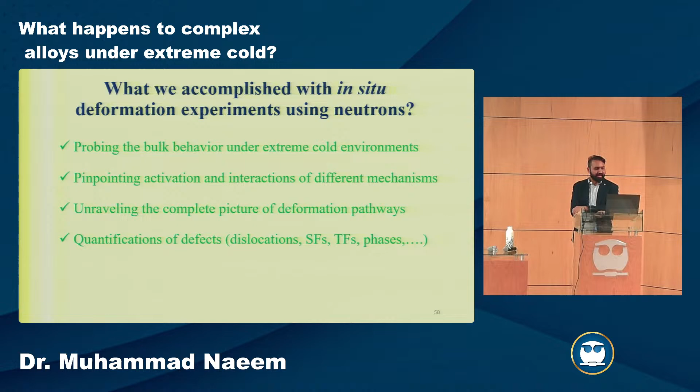It's much more complicated, but still you can have a decent idea of what is going on, how much is contributed by different mechanisms. We can also, like I showed in the last example though I didn't mention it, try to combine it with simulation, and we can give feedback for alloy design. So I'll stop here, and I'll be very happy to take some questions.

Thank you for your presentation. What other advantage is there to working at low temperatures besides increasing resistance? Sorry.

That's an interesting question. One could be superconductivity, because there have been, recently, huge controversies about people trying to make superconducting materials at room temperature, at high temperature. But usually materials have superconducting properties at very low temperature, close to 10 Kelvin, sometimes even lower, in that line of 10, 20 Kelvin. So this does not exist at room temperature, but can exist at very low temperature. Similarly, magnetic properties: we did some work where we saw transformation in one of the alloys, showing paramagnetic behavior at low temperature. So these are some things I can think of on top of my head.